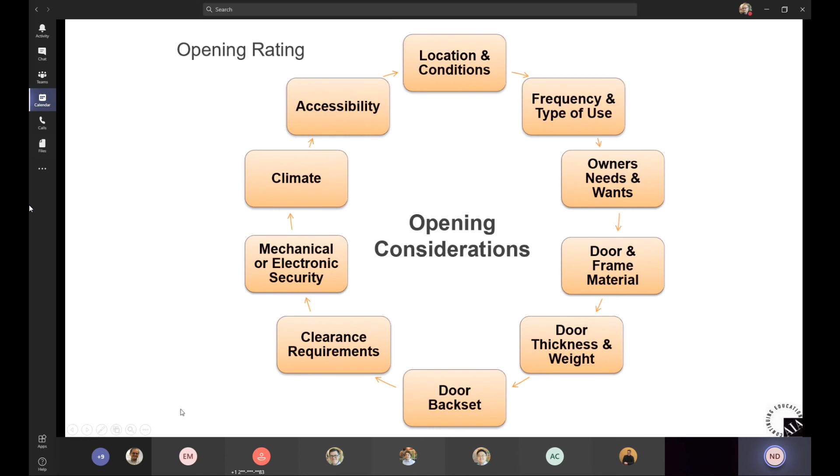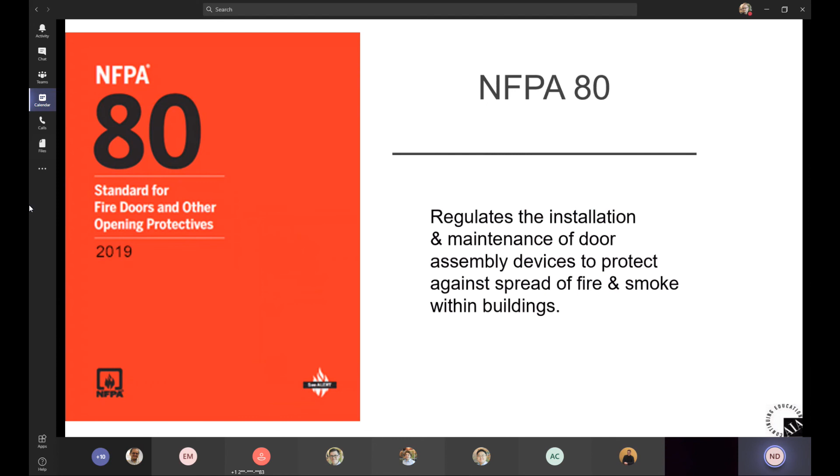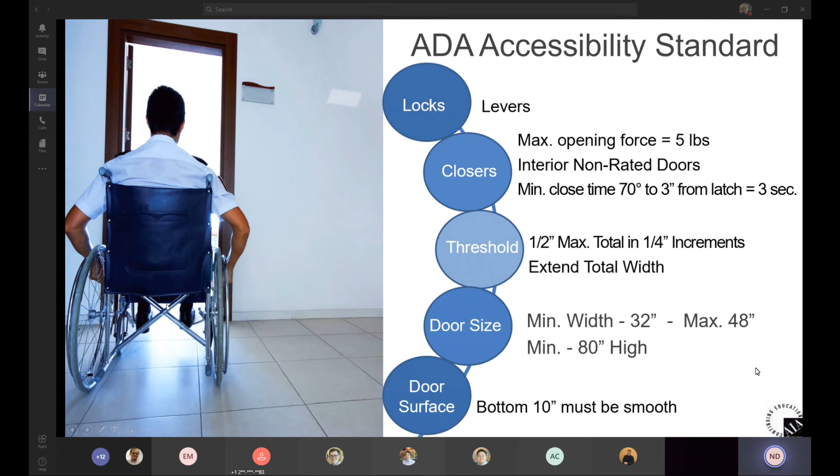Minimum door width of 32 inches clear, max 48 inches, and a minimum of 80 inches high. And then the bottom 10 inches of the door must be smooth, and that is to allow people to, as in the gentleman approaching the doorway here, he's got the foot holders at the bottom of his wheelchair. You don't want those to snag on anything at the bottom of the door, like a full height pull, some other sort of guard or protection down there. So this is all good stuff.

So what we're going to do now is go through the different components of hardware in the DHI or Door Hardware Institute format that we use for setting up a hardware schedule. We start with hanging the door, then move to securing the door, controlling the door, and protecting the door. So best place to start is to hang the door, because if we don't get it swinging in the opening, we don't have much to go on.

So this is a slide I'm not going to belabor, but this is a reference back to the concept of having the right hinge or the right piece of hardware for the application in reference to cycles and how often is this opening going to be used. So possibly this grade 3 hinge, standard weight without bearings, designed for 350,000 cycles, which by itself sounds like a lot, right? But this is the kind of hinge you may put on that closet door, as opposed to this grade 1 hinge. This is the kind of hinge that you would put on the front door of a school.

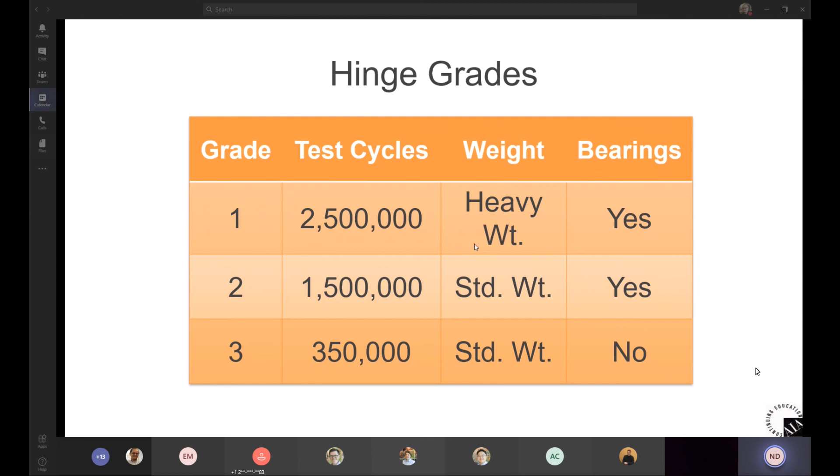So this isn't anything that you need to memorize. It's just an idea or a way for you to recognize how different hinges may be used and why you may see different grades of hinges or weights of hinges on the same project from one opening to another. So it may look inconsistent, but it's actually driven by this sort of thing of which cycles, what the openings are going to be used for, and which hinge is the right hinge for the job.

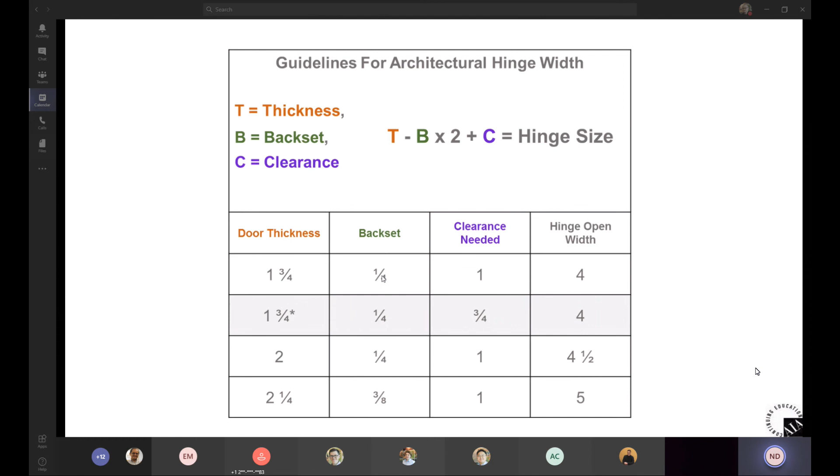These are additional details that you'll see for hinges, other things that we consider. Door thickness is here. This is the hinge back set. You'll notice on handed doors the mortise pocket that's made for the hinge leaves a small amount of material on the edge of the door rather than mortising all the way through. This back set is that dimension.

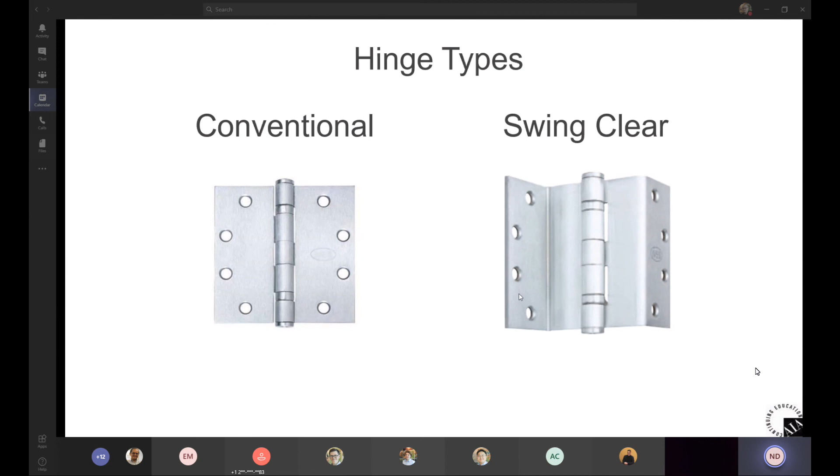Hinge types. Here we go. This is the conventional hinge, which is a standard, also referred to as a butt hinge. This particular hinge has bearings. That's what these items right here are. And this is a swing clear hinge. These bent flanges allow the door to swing out of the opening. You'll see these sometimes in healthcare applications as a way to maximize clear width for moving either wheelchairs or stretchers or that sort of thing through openings.

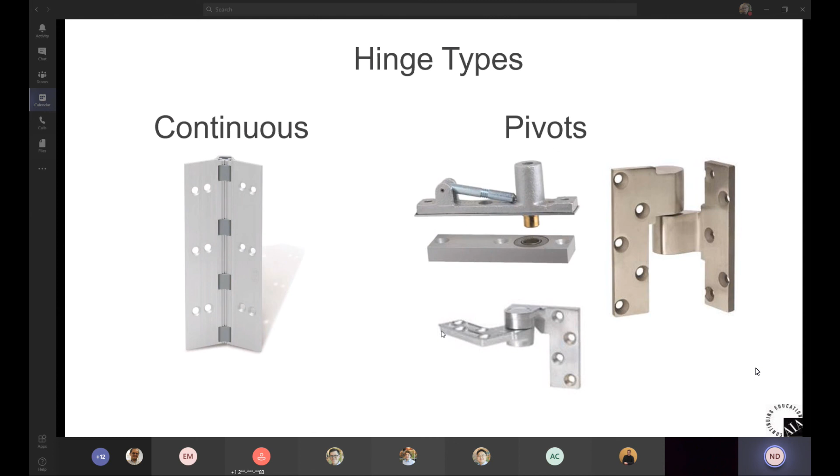You'll see pivots used on some storefront openings, glass doors, that sort of thing. Any questions on hinging before I move on?

Okie doke. Securing the door. So this isn't just about literally locking the door, it's about latching the door. Common lock types are cylindrical or bored locks. These take a 2 1/8 inch circular hole in the face of the door. Deadbolt, this is a lever set, obviously. This is a deadbolt, which would be installed above.

Mortise lock is a reference to this large lock case, which is mortised or drilled, pocketed out into the edge of the door. This is a cylinder. Good news with a cylindrical lock, typically they're unhanded. You can swap function from this keyed function to a passage function without having to concern yourself with the prep on the door, as opposed to a mortise lock, which is prepped according to function.

There's always this pocket to support the mortise lock body itself, but the lever and or key can change by hand and by function. So you need to be very careful about which function is specified for a mortise lock application.

Architectural finishes, they're available in polished brass, satin chrome, satin stainless steel, oil rubbed bronze, all sorts of different finishes, architectural devices. Lever designs can match the balance of the project. So in addition to the fact that there are many more lever styles than there once were, there is also a focus on suiting the lever styles so that you can use the same lever style from your exit device trim to a cylindrical lock to a mortise lock. Ways that functional hardware can now contribute to the aesthetics and the design feel and atmosphere of a building, which is a great thing.

This is delayed egress again. It's a panic device that's designed to prevent immediate egress for either safety or security reasons. Again, common in memory care applications or retail rear doors, that sort of thing. When the device actuator bar is depressed and held, it will, after 3 seconds, initiate the irreversible process, which allows egress in not more than 15 seconds. So that irreversible process and that delay from just bumping the device to holding it down for 3 seconds means if somebody just accidentally bumps into this, it's not going to go through that irreversible alarm state process.

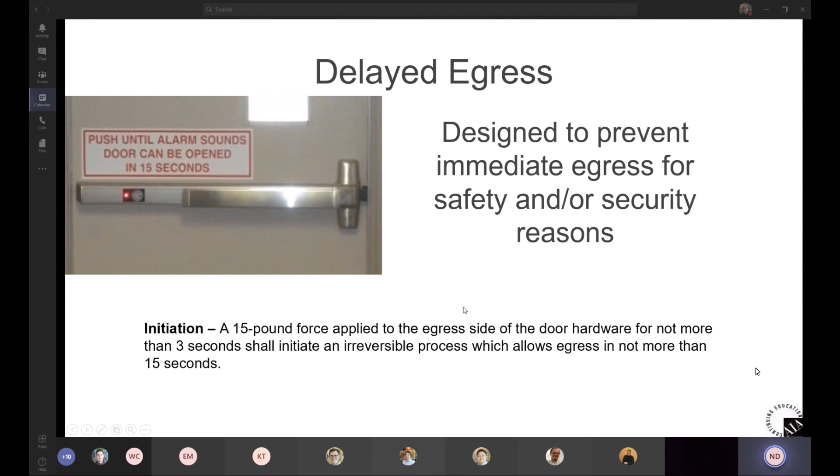And you'll see there's a cylinder on this rail for this device. These, once they're actuated, need to be reset. And the idea with the key is that it's someone that's responsible that has that particular credential, in this case, which is a mechanical key.

This slide is in reference to opening hardware design, period. And it's not just about mechanical hardware, it's also about electrified hardware. How should this opening work? It's especially critical with electrified hardware so that everybody understands what happens when you approach the opening, when you present a credential. How does the hardware behave? Is the opening monitored? What happens with the access control system? All of that sort of activity.

So it's really important that conversations are held early and often about opening operation so that the right hardware is specified and the coordination occurs between the owner, the architect, the subcontractors, and the security integrators. And mechanical hardware can be spooky enough. When you get into access control and electrified hardware, it can become even more challenging and more complex. Again, that's a situation where leaning on your hardware consultant will make it much, much easier to navigate and help structure those conversations so they're productive.

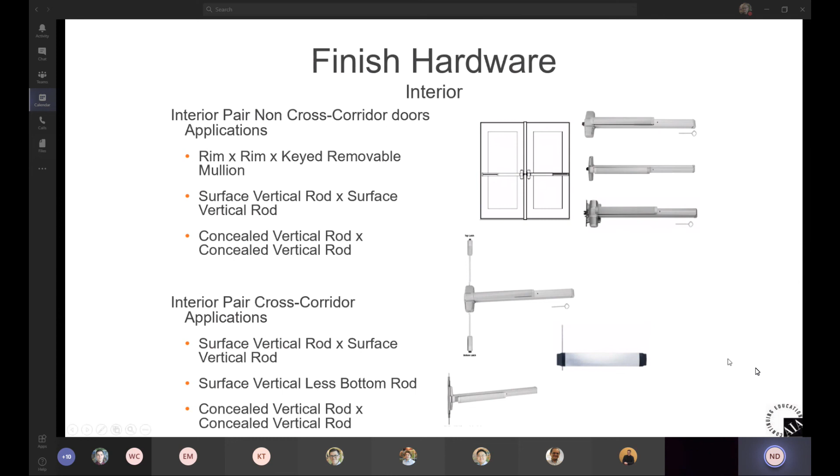I'm not going to linger on this slide either. This is about finish hardware and the different types of applications that you'll see, different types of hardware for a particular application. Some of this is related to convenience, some is related to how the doors have been tested, especially fire doors with latching and that sort of thing. You'll find that there is frequently more than one way to achieve the functional and code requirement needs of a particular opening.

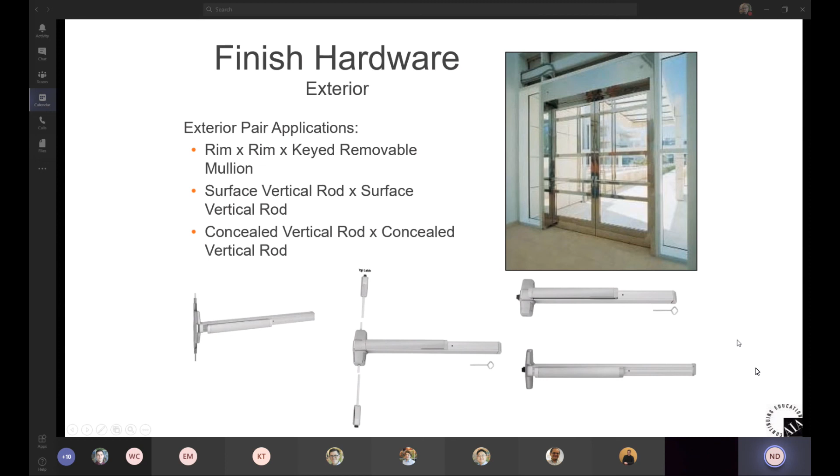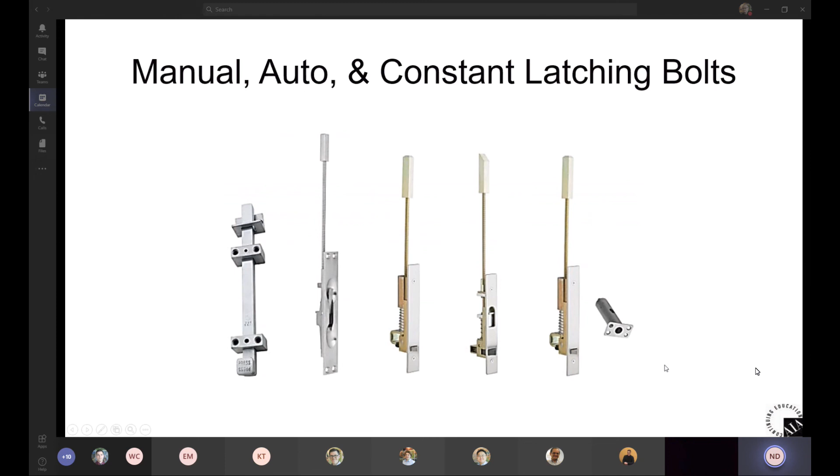The idea of electronic access control is that you have more data about what's happening at the opening. So it's who's got the credential, whatever credential was assigned to a particular person, where did they go with it, and when were they there.

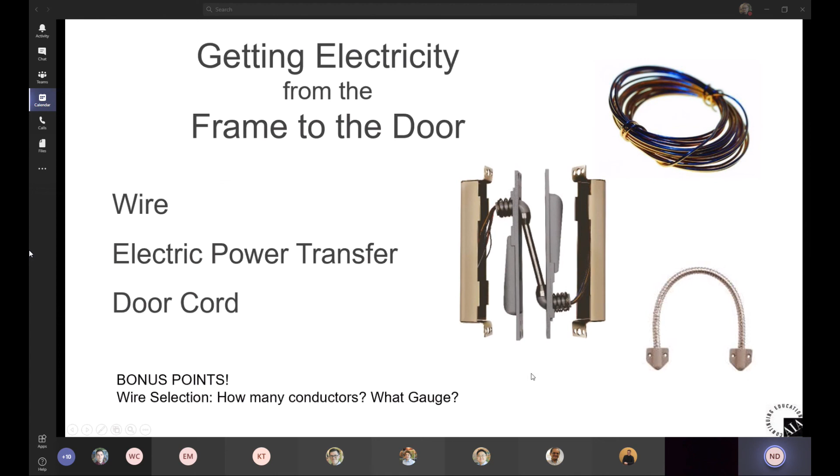This little bonus point down below here is how many conductors and what gauge. So this wire that's shown here has a plastic shield over it, and inside there are multiple strands. For instance, 18 gauge 4-conductor wire is one. So if you ever hear something about conductors and gauge in reference to electrified hardware, it's how many strands that particular piece of hardware requires to transfer power and data.

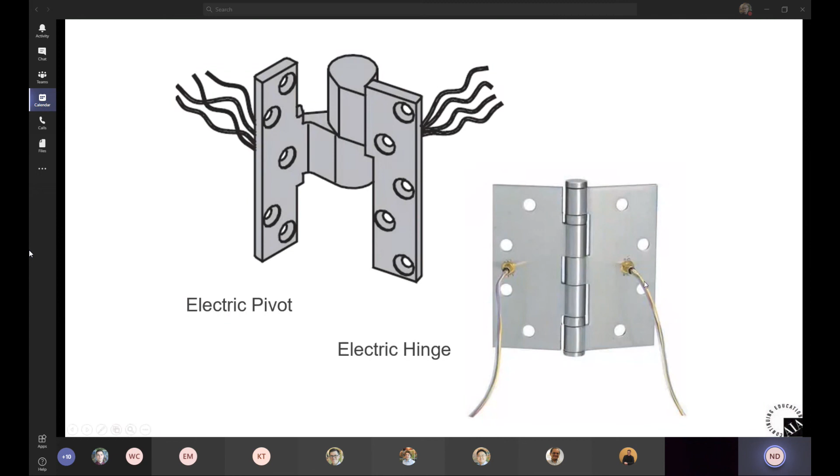This is an electrified pivot. Again, that's concealed. Same thing with this butt hinge. The wires actually go through the flanges, through the center barrel, and back out the other side. These ferrules on the back can be prone to damage, so that EPT that we showed on the previous page is actually the safest and least likely to become damaged.

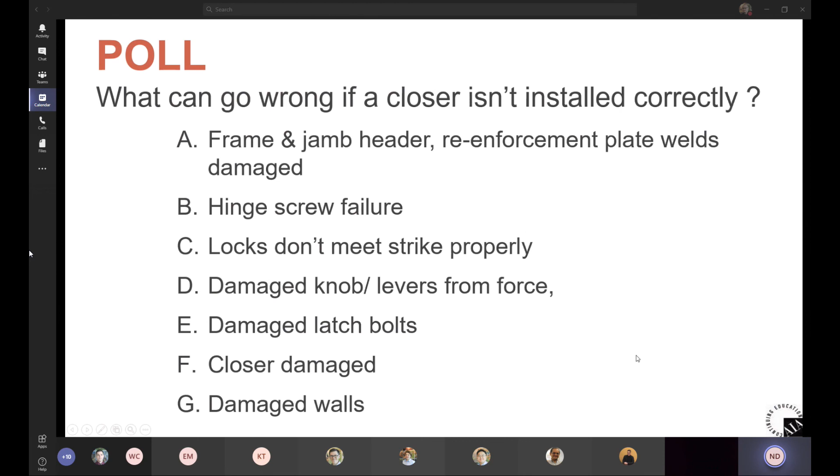Rick, what do you think? Absolutely. Absolutely everything can go wrong, right? Yep. Every time the door slams, the screws want to loosen and affect all the door. So we absolutely control the door. Exactly. Yeah. So again, specifying the right closer is a critical piece to start with.

But after you specify the right closer, we need to make sure that it's installed correctly and maintained. Closers are one of those pieces of hardware that need to be adjusted on a regular basis. And you'll find that in specifications in the execution side and follow-up side about maintaining those pieces of hardware so they function correctly, from when they're initially installed to when the building is handed over to the owner, and then a certain period of time after the fact.

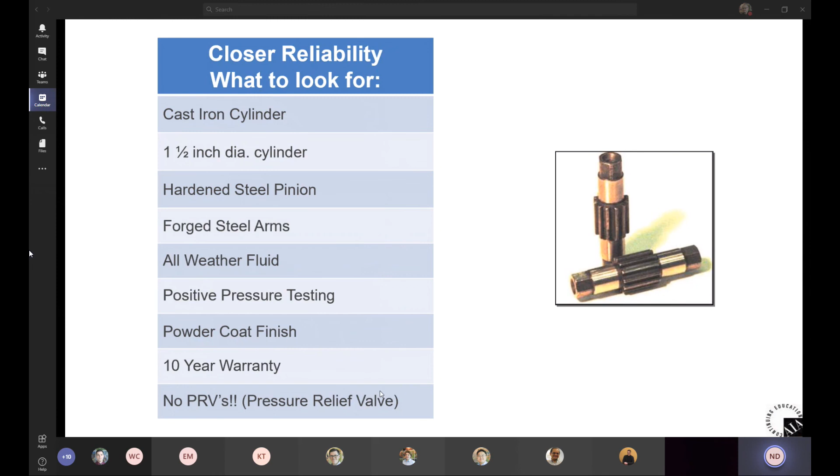These are different pieces of closer construction and engineering to look for. Not going to linger there, but there are different things that can affect how a closer functions and lasts. Closer style, typically covers are one of the things that people notice most often. This one has a full cover. Slim cover would only be about half this height, and with no cover, the closer is still going to function. It's just not going to be as aesthetically pleasing.

Architectural plated finishes are available. Typically, closers are powder coated, but you can have them plated. I will caution you that while they look gorgeous, they are expensive and they extend lead times. The good news is you don't have to plate an entire closer. And again, this is something you may want to do on a high profile opening, but not at a back of house opening.

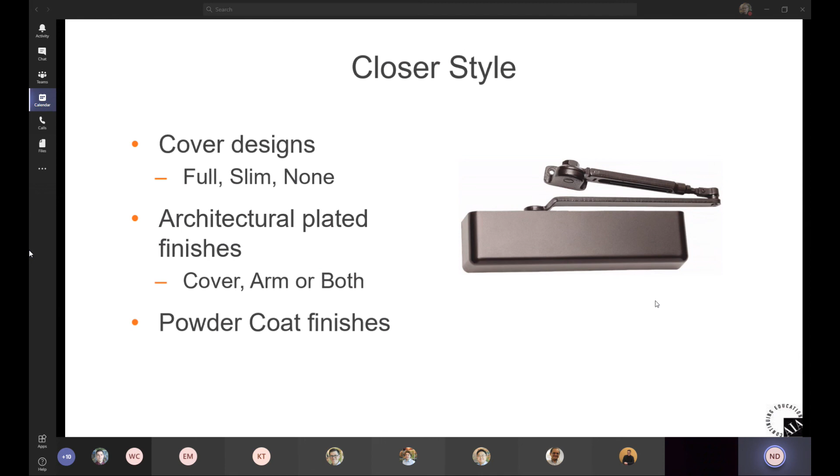What does the closer do for you? It controls the opening force and speed, and it controls the closing speed and latching force. So again, adjustment is critical on closers. You need to make sure that each part of their opening area is the right speed to make the doors open, close, and latch properly.

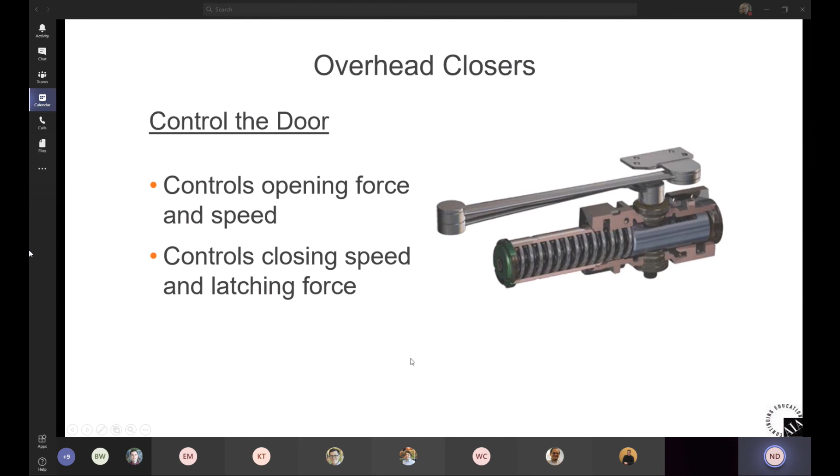This is a slide, brief slide about auto operators. The easiest way to think of them is a high energy operator is an operator that always opens or closes a door. For instance, when you approach a grocery store or another kind of retail store, some high traffic office buildings, hospitals, that sort of thing, just approaching the opening opens the door with one of these high speed operators. There's no knowing act, right? You just go up to it and it opens the door.

These are designed for lots of cycles, heavy duty operator. These require mats and rails and safety sensors to make sure that nobody is hurt going through these openings, that traffic is controlled. A low energy operator is used for accessible entrances or some application where occasionally assistance is needed

to open the door. And these are operators that initiate when you either push an actuator on the wall, or, as is becoming more and more popular with the advent of COVID, those touchless, hands-free actuators.

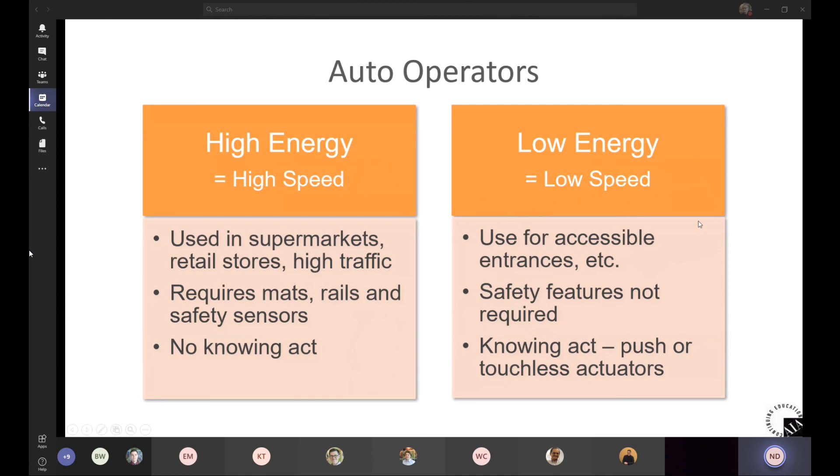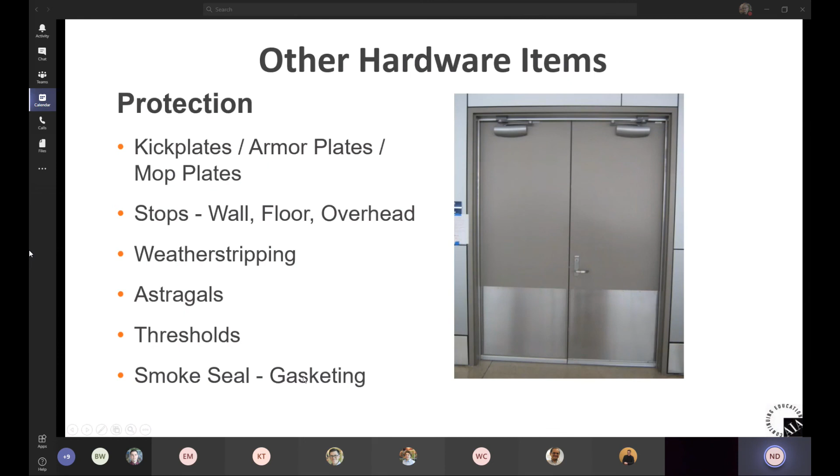Wall stops, floor stops, overhead stops, astragals, which is a piece of hardware that would either be surface applied or mortised or self-adhesive between two leaves of a pair, thresholds, and again, smoke seal or gasketing. So in these brief few moments, we've gone through hanging the door and securing the door, controlling the door, and protecting the door.